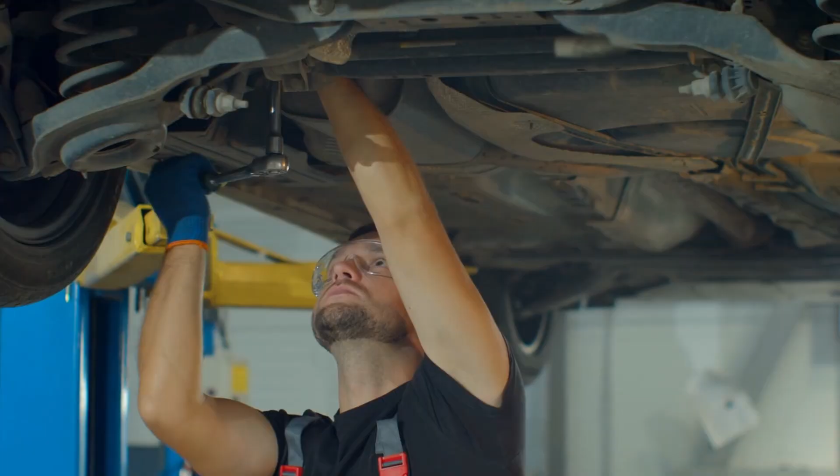There's a secret brotherhood of drivers whose cars outlive decades, even generations. They don't brag, they don't post, they just follow habits the rest of the world forgot. Today, you will learn those secrets, and by the time we reach the last one, you'll see why even professional technicians often skip it without realizing what it costs them in longevity.

Number 1. Warm up the oil, not the cabin. Every winter morning, millions of engines suffer in silence, all because their owners chase comfort before care. You turn the key, blast the heat, and think you're helping yourself. But you're quietly hurting the one thing keeping your car alive. Oil is like blood. When it's cold, it can't protect, can't heal, can't move. So next time, remember, it's not the cabin that needs warmth first. It's the heart beating under your hood.

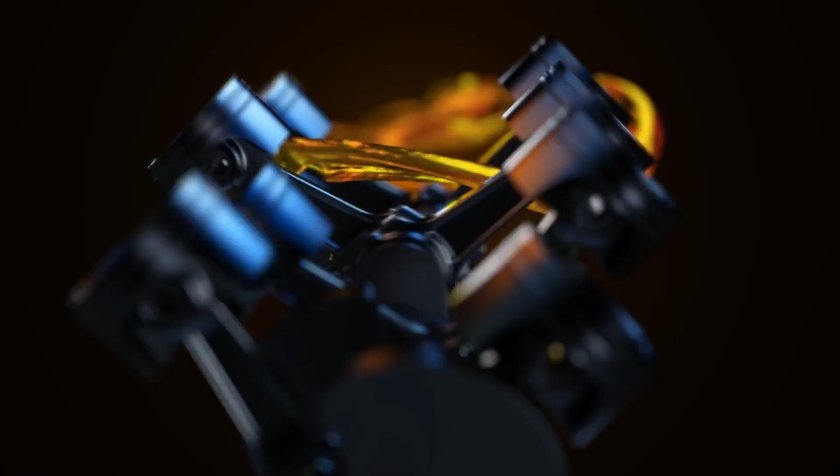The right way to warm up is to drive gently within half a minute of starting the engine. Keep the RPMs low until the temperature gauge stabilizes, allowing the oil to circulate and reach full pressure quickly. This method warms the oil through motion, not wasted fuel, and keeps friction surfaces healthy. Drivers who do this see smoother startups, fewer deposits, and significantly less internal wear. It's the easiest daily habit to extend your car's lifespan.

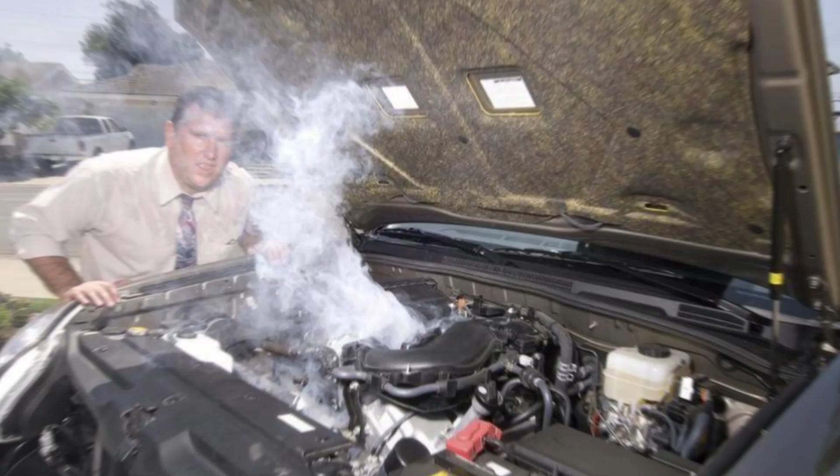Number 2. Change coolant based on chemistry, not mileage. Your car doesn't care about your schedule, it listens to chemistry. Inside your cooling system, every drop of fluid is fighting a war: metal versus oxidation, heat versus protection. Over time, the balance shifts. Additives die, acids rise, and your coolant turns from protector to predator. That's why smart mechanics don't trust mileage, they trust science. Change it by chemistry, or chemistry will change your engine.

Don't wait for a failure or a schedule. Test the coolant's pH and freeze protection twice a year. You can buy a simple test strip kit for a few dollars. If the coolant shows acidity below pH 7 or the color looks rusty, it's time to flush it out.

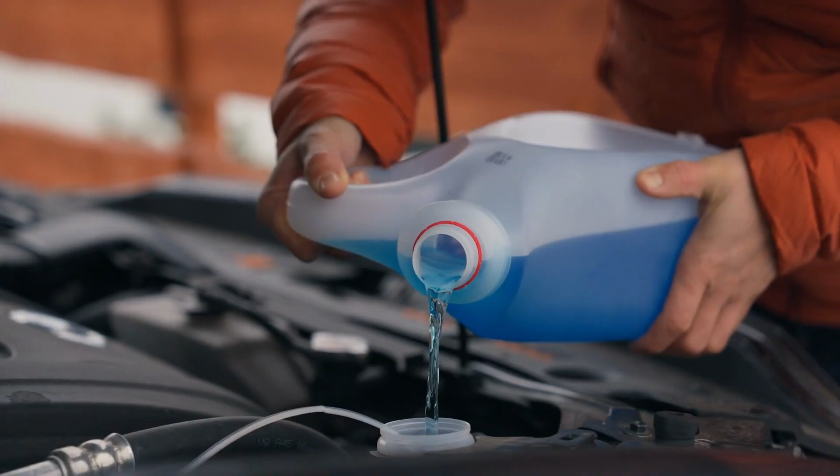The trick is to refill with distilled water mixed with the exact type of coolant your engine requires, not random green or orange fluids. Mixing the wrong chemistry can cause gel formation and block passages inside the engine. This habit keeps your water pump seals healthy and prevents internal rust, which means your cooling system can last as long as the car itself.

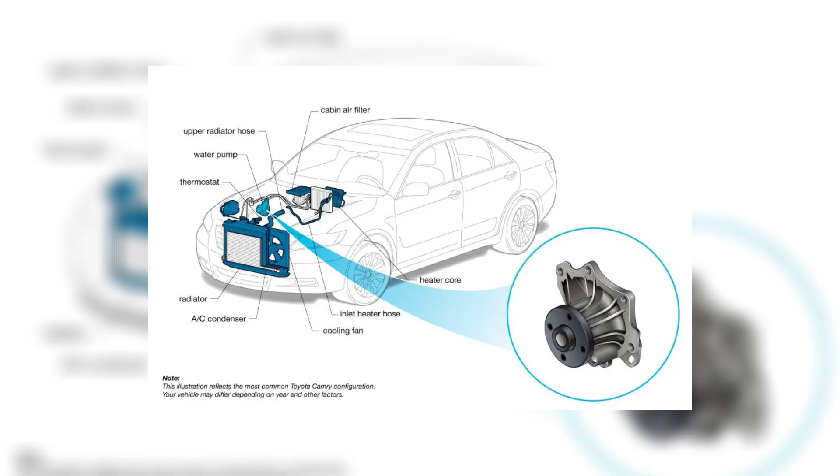Number 3. Change oil by engine hours, not miles. Miles don't kill oil, time does. Every second your engine idles, it's burning chemistry, not distance. Oil doesn't age by how far you drive, but by how long it endures heat, friction, and combustion scars. Think of it like your body. It's not about steps walked, but hours survived under stress. Change oil by hours, because that's how your engine actually lives its life.

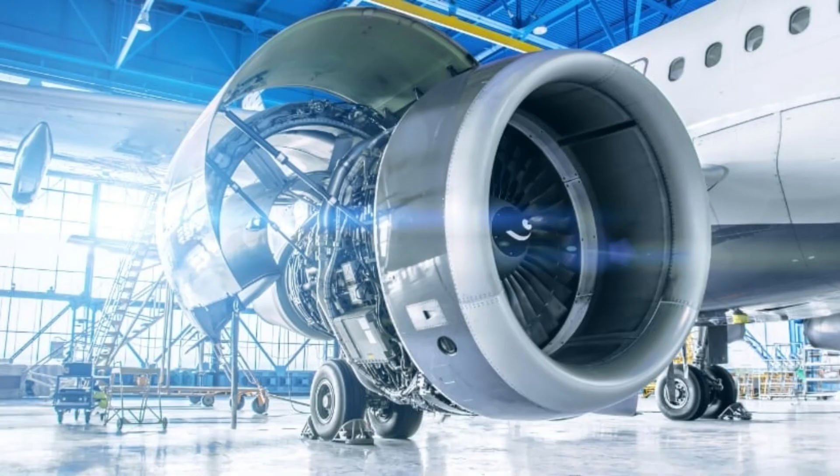A car that idles in traffic for 30 minutes has burned oil life just as fast as one cruising at highway speed. That's why taxis, delivery vans, and even aircraft engines measure wear in operating hours instead of distance. The truth is that 5,000 highway miles might equal only 150 hours of engine time, but 5,000 city miles can be over 250 hours. If your vehicle has an hour meter, use it.

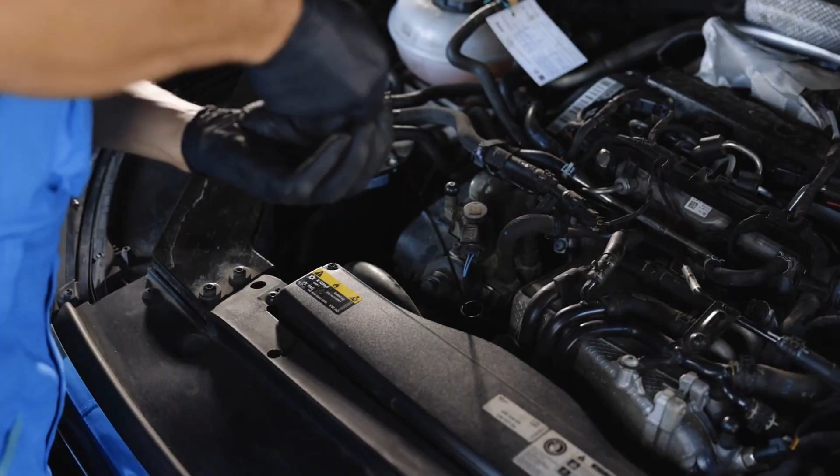If not, estimate 1 engine hour for every 25 to 30 miles of mixed driving. Then adjust your oil change schedule based on that number. It's the difference between replacing oil when it's actually degraded and running it far past its protection limit. Drivers who switch to this system often double their engine lifespan because they catch oxidation and fuel dilution before it becomes irreversible damage.

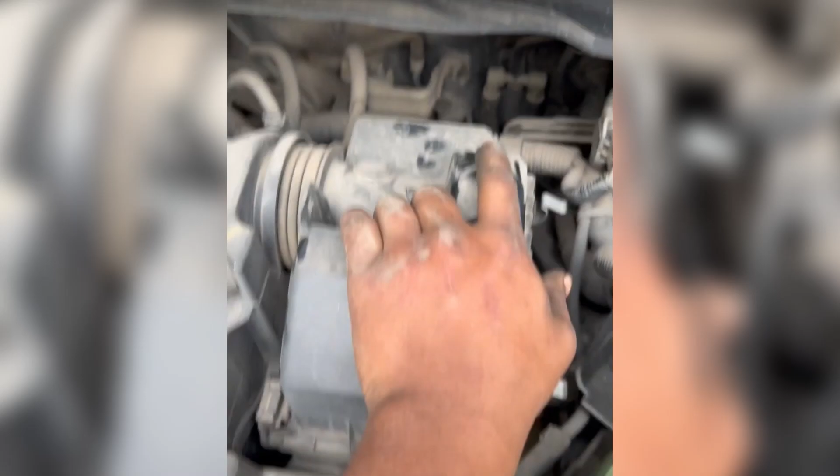Number 4, clean or replace the air filter before it looks dirty. The biggest mistake drivers make is trusting their eyes. Air filters don't fail when they look dirty, they fail when they stop breathing. The danger hides in what you can't see: microscopic dust clogging the fibers long before color changes. By the time it looks bad, the damage is already done. Think of it this way: your lungs don't turn brown before they struggle. So don't wait for dirt to show you it's time. Listen to the science, not your sight.

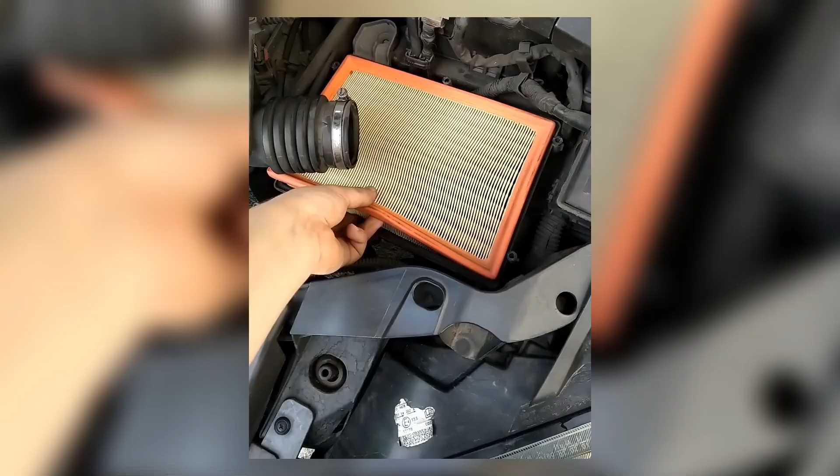That dust doesn't disappear, it embeds itself in the cylinder walls, piston rings, and valves, grinding them down over time. Lab oil analyses on neglected engines show higher levels of silica, the same compound found in sandpaper. The smarter habit is to change your air filter based on driving conditions, not appearance. If you drive in dusty, hot, or coastal environments, replace it every 10,000 to 12,000 miles or even sooner. Rural and desert drivers do it twice as often as city commuters.

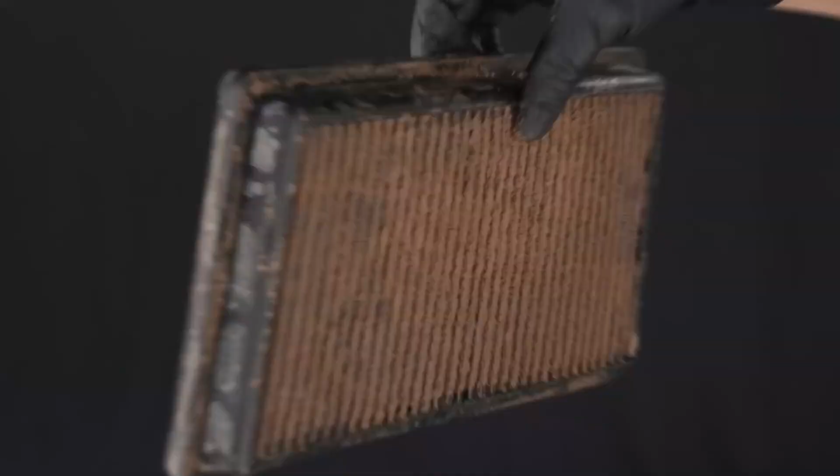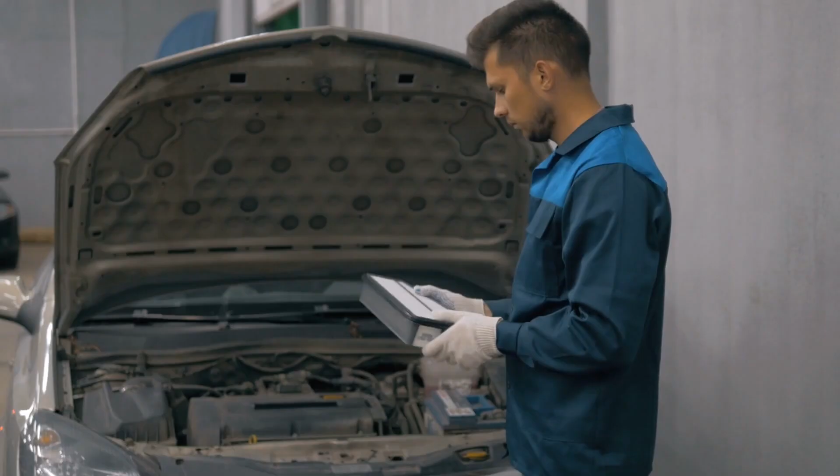If your car uses a reusable filter, clean it thoroughly with manufacturer-approved cleaner and let it dry completely before reinstallation. Never blow compressed air into it. That weakens the fibers and lets dust pass straight into the intake. A clean filter means clean air, balanced combustion, and a longer-lasting engine that breathes easily well beyond 500,000 miles.

Number 5. Use top-tier fuel and keep injectors clean. Every drop of fuel carries a story. It either cleans or it corrodes. Your injectors are surgeons cutting with microscopic precision, but bargain fuel dulls their blades. Over time, residue builds, spray patterns warp, and combustion turns chaotic.

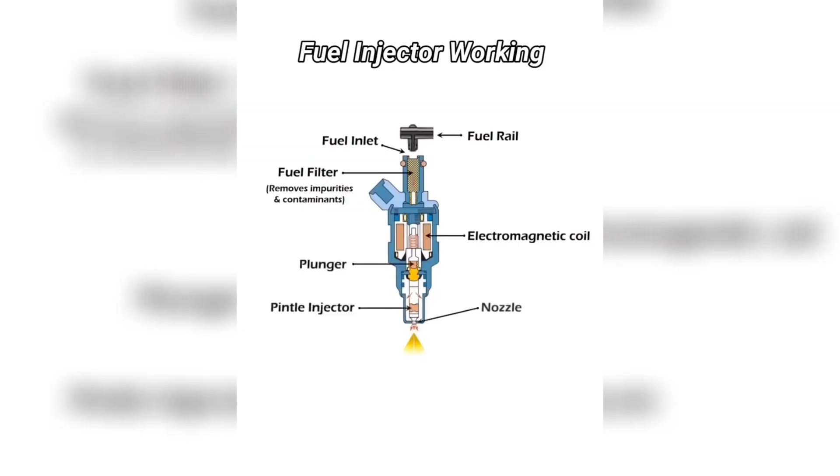The difference between a clean engine and a tired one isn't luck, it's chemistry. Top-tier fuel isn't luxury, it's protection for the heart of your machine. Keep it clean, or every mile you drive writes damage in invisible ink. Fleet mechanics and high-mileage drivers use only top-tier certified gasoline brands like Chevron, Shell, Exxon, or Costco. These contain higher detergent additives that keep injectors and combustion chambers clean.

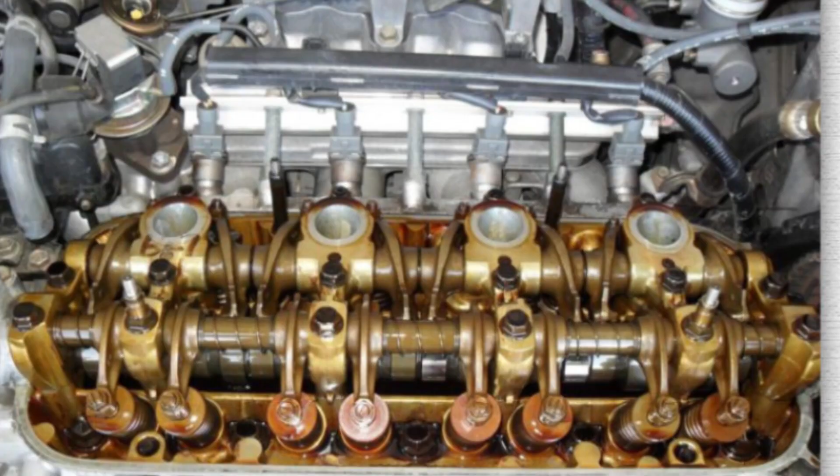If your car has already developed deposits, a good injector cleaner every 3,000 to 5,000 miles can dissolve residue and restore proper spray patterns. To make the cleaner work effectively, add it before a full tank. Then drive at highway speed for at least 20 minutes to help the solvent circulate through the injectors.

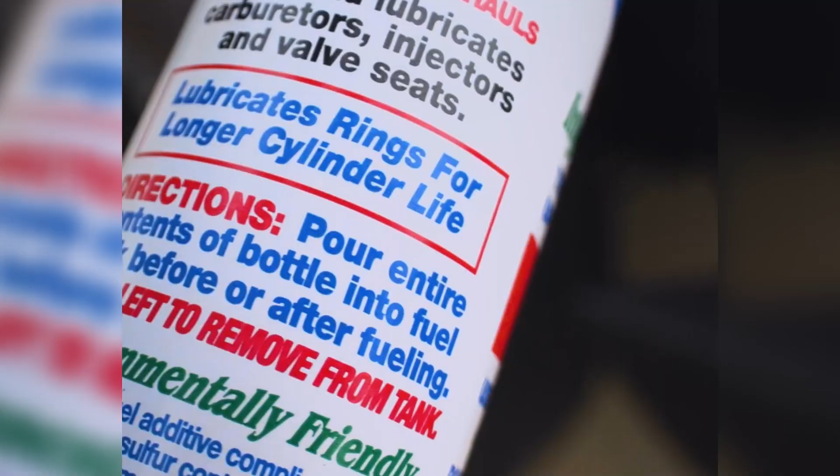The result is smoother power delivery, fewer misfires, and balanced fuel trims that keep wear minimal. This prevents hard carbon buildup, keeps fuel economy steady, and stops the slow loss of compression that ruins most engines before 300,000 miles.

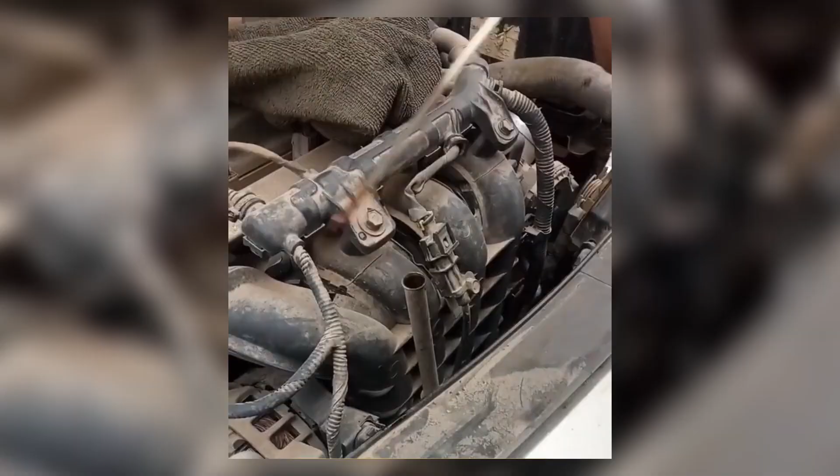Number 6. Check oil condition, not just oil level. Full doesn't mean healthy. You can top off a sick engine all you want, but if the oil's chemistry has broken down, it's like giving clean bandages to a bleeding wound. Oil is your engine's bloodstream. It carries heat, debris, and protection in every cycle. When it darkens, thickens, or smells burnt, it's not oil anymore, it's decay. Don't just measure how much life your engine has left, read it in the oil itself.

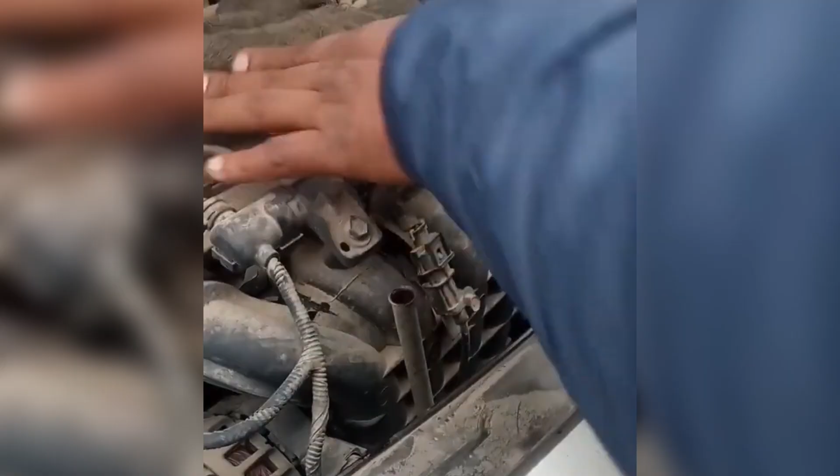When you check oil, rub a drop between your fingers. If it feels gritty or looks like dark syrup, it's carrying abrasive particles that grind internal parts. If it smells like gasoline, that means fuel dilution has thinned it, reducing lubrication. And if it appears milky or foamy, coolant is leaking into the system, a sign of a failing head gasket or oil cooler. A 5-second inspection every month can reveal thousands of dollars in damage before it happens.

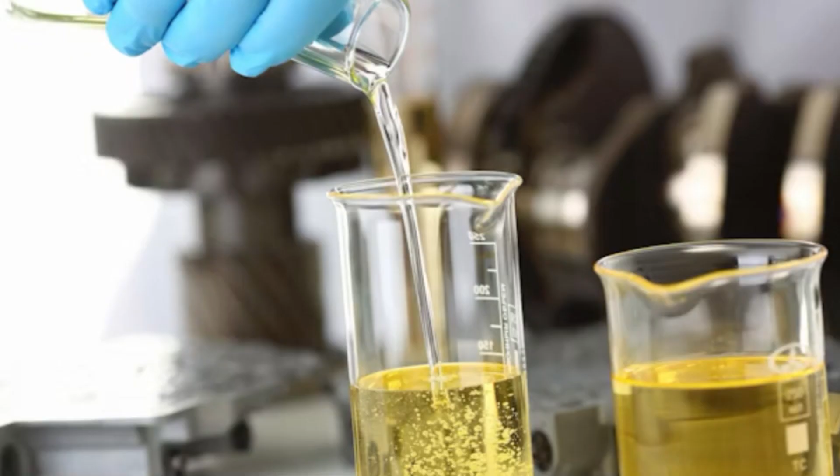High-mileage drivers go a step further. They send oil samples for lab analysis once a year. For about $30, these tests detect microscopic metal wear, coolant intrusion, or fuel dilution that no dashboard light will ever warn you about. That data lets you fix small issues long before they become catastrophic. It's why serious owners of Toyota, Lexus, and Honda engines routinely surpass 500,000 miles without major repairs.

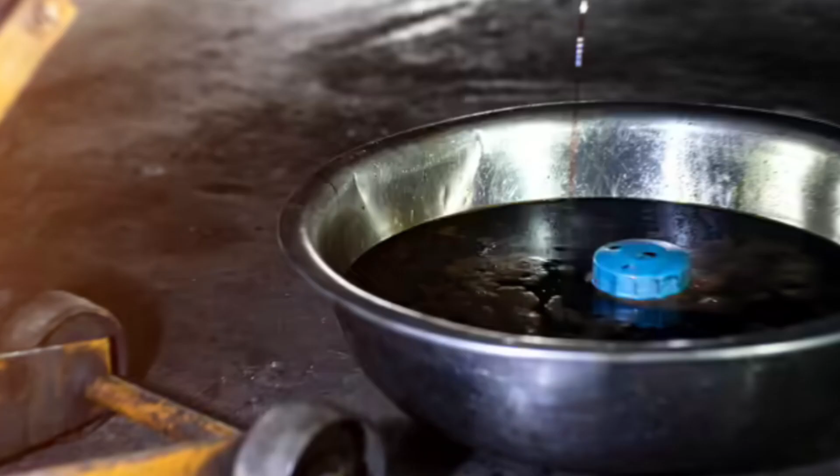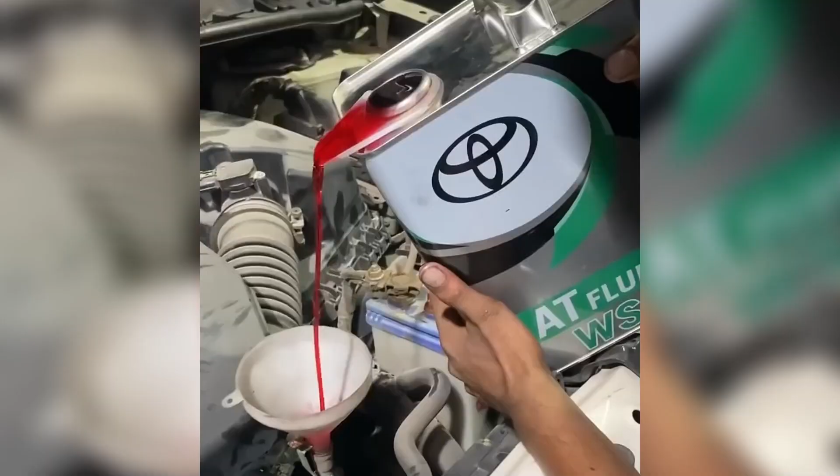Number 7. Replace transmission fluid before it burns. You'll never see the moment it burns, but your transmission will feel it forever. Fresh fluid glows red, alive, and protective. Burnt fluid turns dark, thin, and bitter, like metal fatigue in liquid form. Once it scorches, every shift cuts deeper into the heart of your gearbox. Replace it before the smell of failure appears, because when transmission fluid burns, it doesn't just lose color, it loses mercy.

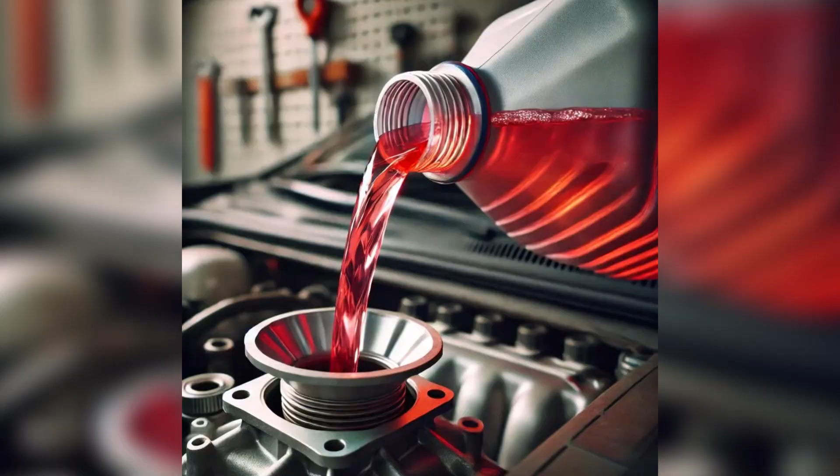The simple fix is to change your fluid every 40,000 to 60,000 miles, or even sooner if you tow, drive in heavy traffic, or live in hot climates. Use only the fluid type listed in your owner's manual. Mixing brands or specifications can cause swelling in seals and unpredictable shifting.

If your car has a transmission filter, replace it during every fluid change. This small detail keeps contaminants out of the hydraulic system and extends the life of your torque converter and clutch packs. Following this one rule alone can push an automatic transmission to 400,000 miles or more, while ignoring it guarantees failure long before that.

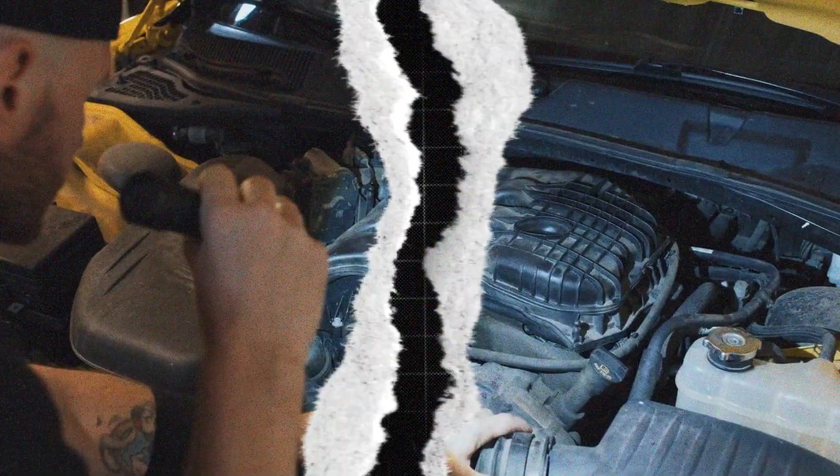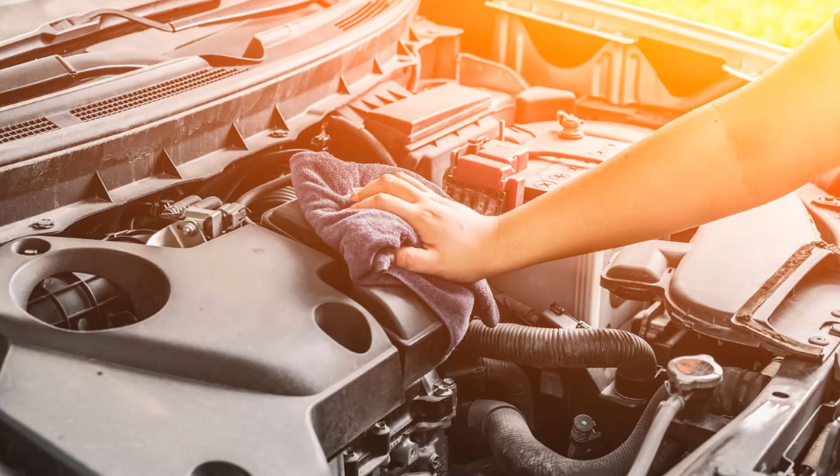Number 8. Keep engine bay temperatures under control. Every car fights two enemies, friction and heat. You can't see them, but they're always there, eating power and patience with every drive. The engine bay is where that war happens, where discipline meets destruction. Let the heat go unchecked, and even steel begins to soften. Sensors lose truth, and fluids turn fragile. Keep your temperatures under control, and you don't just protect parts, you preserve precision. Because in machines and in men, control over heat is control over life itself.

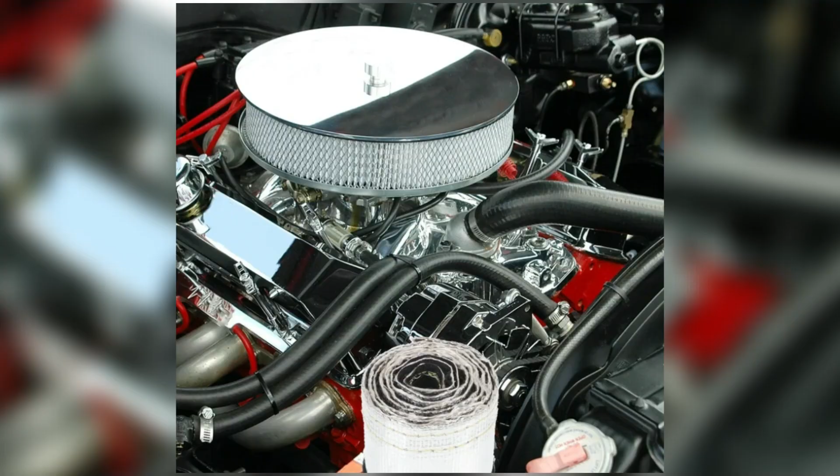To prevent this, regularly clean your radiator and condenser fins using low-pressure water or compressed air. Dirt, bugs, and debris block airflow, forcing the cooling system to work harder. A 10% restriction in airflow can raise coolant temperatures by over 20 degrees Fahrenheit during long drives. You should also inspect heat shields and underhood insulation. They protect wiring and critical sensors from radiant heat. If they've fallen off or rusted away, replace them immediately.

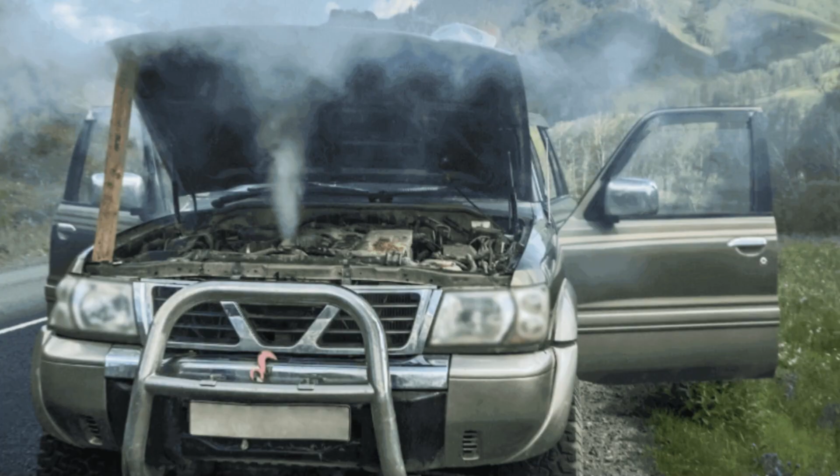For drivers in warm or high-altitude areas, consider installing a lower temperature thermostat or switching to a higher boiling point coolant mix. These small adjustments reduce thermal stress and delay the chemical breakdown of vital components. Engines that stay cool stay clean inside, as oil oxidation and deposit formation slow dramatically when heat is controlled.

This one habit can mean the difference between a 300,000-mile engine and a 700,000-mile legend.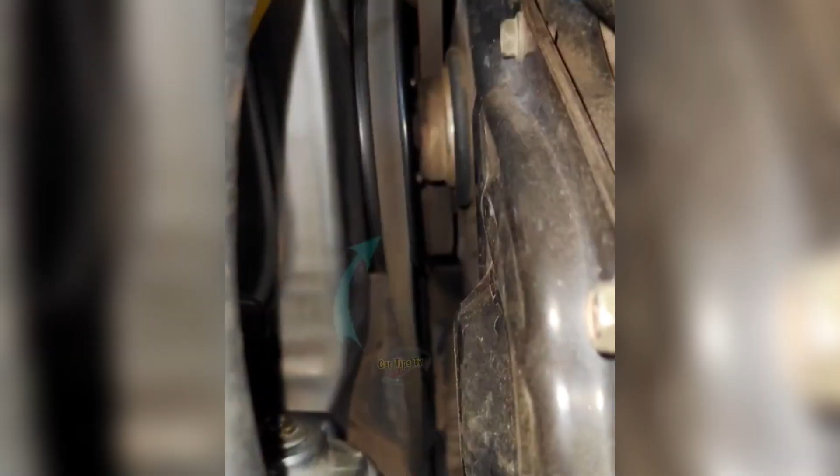Number 9. Replace belts and tensioners before they squeal. Engines don't fail suddenly, they whisper first. A squeal is just the sound of ignored timing, the voice of tension lost. Belts stretch, slip, and scream before they snap. And when they do, everything that depended on their rhythm collapses.

Replace them before they beg, because silence isn't just golden, it's earned. In cars, as in life, the wise don't wait for noise to prove something's wrong. They listen before it starts. Smart drivers inspect their belts every 30,000 miles and replace them every 60,000 to 80,000, even if they look fine. Small cracks or shiny edges are early warnings.

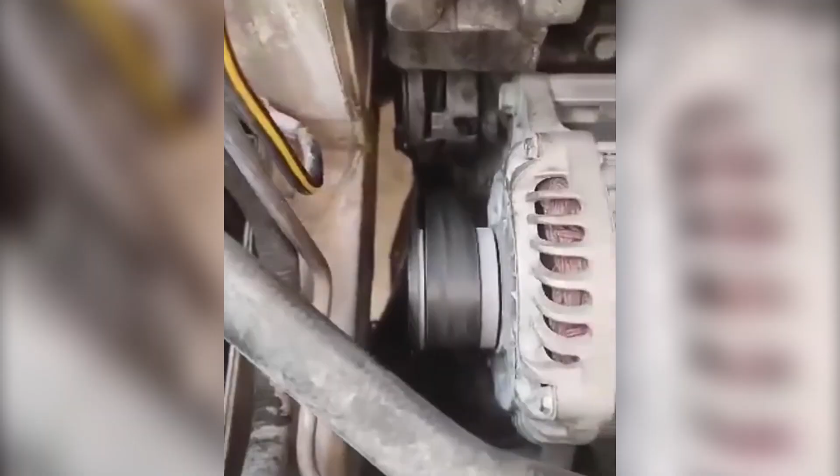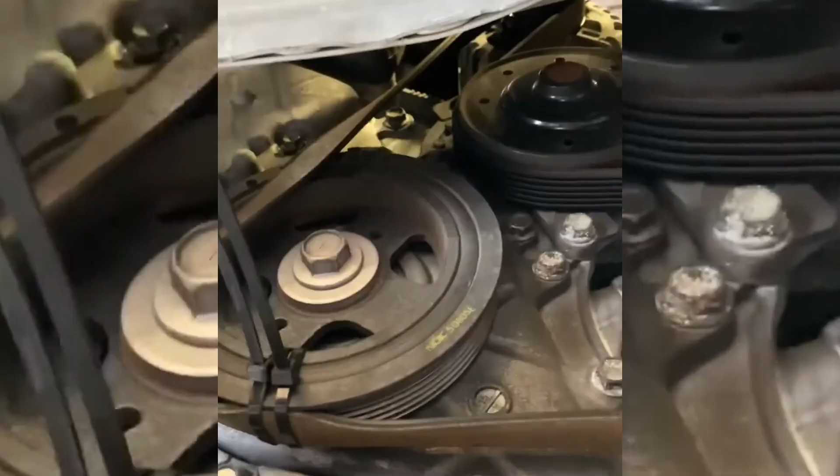When replacing belts, always install a new tensioner and idler pulley together. This ensures consistent tension and prevents premature failure. For timing belts, always follow your manufacturer's interval exactly. A skipped tooth can throw off valve timing or destroy an interference engine in seconds. Proactive belt maintenance costs less than a full tank of gas, but can save you thousands in catastrophic engine damage.

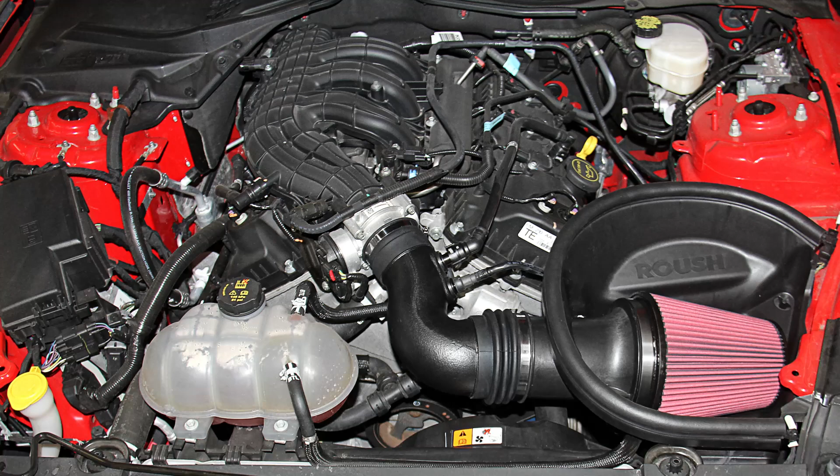Number 10. Keep the intake system spotless. Engines breathe just like we do, and purity matters most where the eye can't see. The intake is the first gate between chaos and order, where every particle of dust tries to steal power before it's born. A spotless intake isn't vanity, it's precision. It keeps airflow honest, combustion balanced, and performance alive. Because when an engine breathes clean, it thinks clearly. And when the air gets dirty, even power begins to forget who it is.

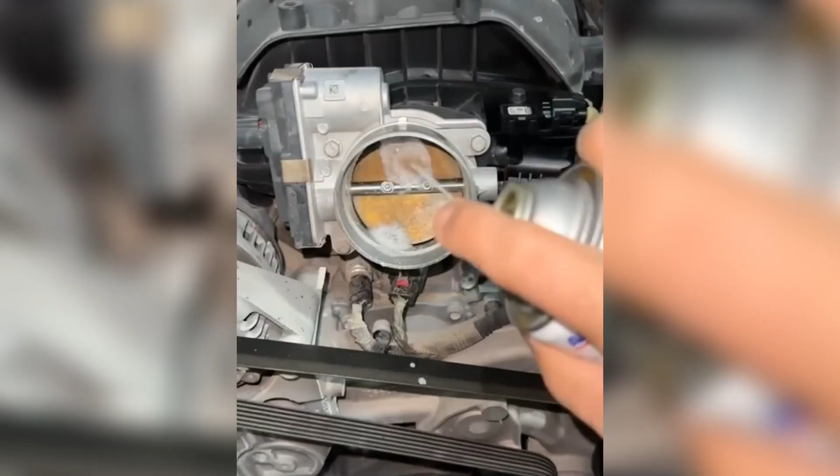For gasoline engines, clean the throttle body every 20,000 to 30,000 miles using a proper throttle body cleaner and a soft microfiber cloth. Pay attention to the throttle plate and the bore. Even a thin layer of film can cause rough idle, hesitation, or sticky acceleration. For direct injection engines, go further. Because fuel never washes the intake valves, carbon builds up fast.

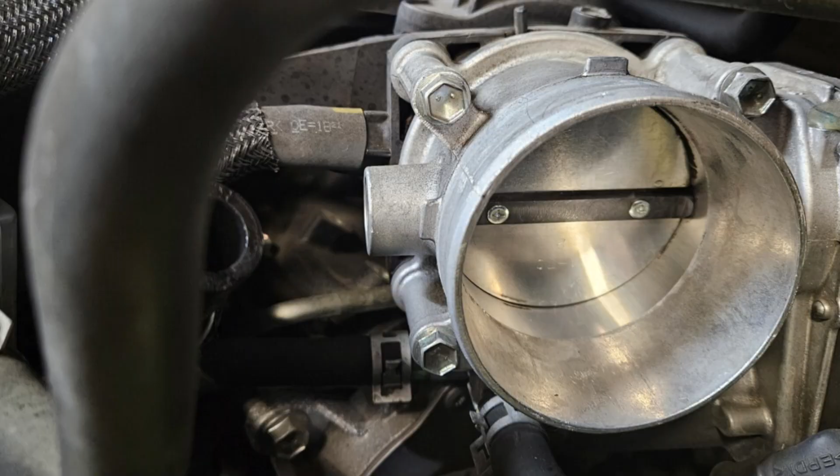Use a valve cleaner or get a professional walnut blasting service around every 40,000 miles. It restores smooth airflow and compression without disassembly. Clean air passages mean balanced combustion, better power, and fewer deposits on pistons and rings. It is one of the simplest yet most overlooked ways to keep an engine feeling brand new after hundreds of thousands of miles.

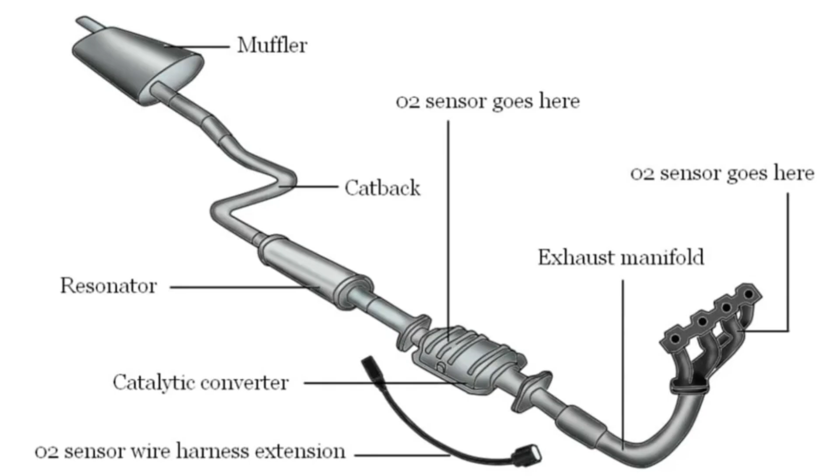Number 11. Keep the exhaust system leak-free and breathing right. The exhaust is your engine's exhale, where power finds release and pressure finds peace. When it leaks, the rhythm breaks, the sensors lie, and the harmony of combustion turns confused. A clean, sealed exhaust isn't about noise control, it's about balance. It lets the engine let go without losing its truth. Because even machines need to breathe right, and when the breath leaks, strength fades with it.

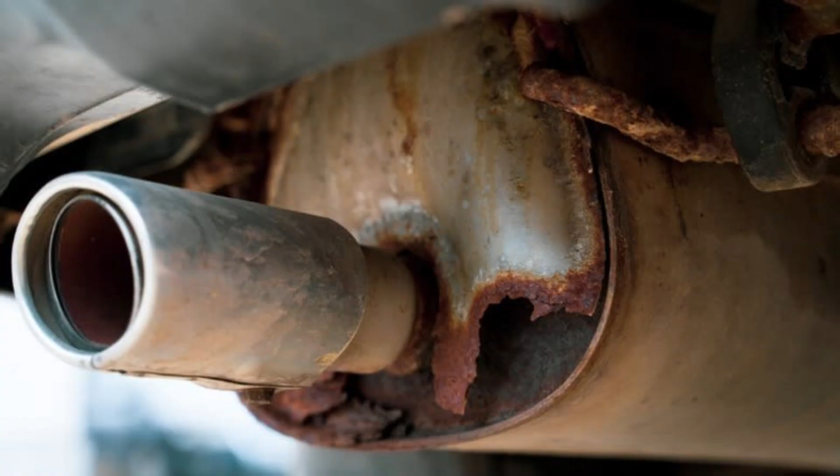The result is subtle at first: rough idle, hesitation, or slow throttle response. But over time, those incorrect readings create a feedback loop of poor combustion and excessive heat. It also allows moisture to enter, rusting the system from the inside. Check your exhaust once or twice a year, especially after winter or driving on salted roads. Look for soot marks, small holes, or a ticking sound when the engine is cold.

A simple clamp or weld repair can prevent long-term damage that spreads to the catalytic converter and even the engine block. Keeping the exhaust sealed ensures accurate sensor data, optimal air-fuel ratios, and balanced back pressure. When your exhaust breathes right, your engine runs smoother, cleaner, and cooler.

Number 12. Monitor engine temperature and oil pressure daily. An engine doesn't die suddenly. It drifts toward failure in silence. Temperature and oil pressure are its two truths, its pulse and breath. Watch them daily, and you'll see the story before it becomes tragedy. A calm needle means harmony. A sudden shift means pain. It's not paranoia, it's awareness. Machines, like people, don't collapse without warning, but only the attentive ever notice.

Make it a habit to glance at both gauges every time you drive. The temperature should reach its normal zone within a few minutes and stay steady, even during long climbs or heavy traffic. If it climbs higher than usual or takes too long to warm up, you could have a weak thermostat or failing fan clutch. Oil pressure is even more critical.

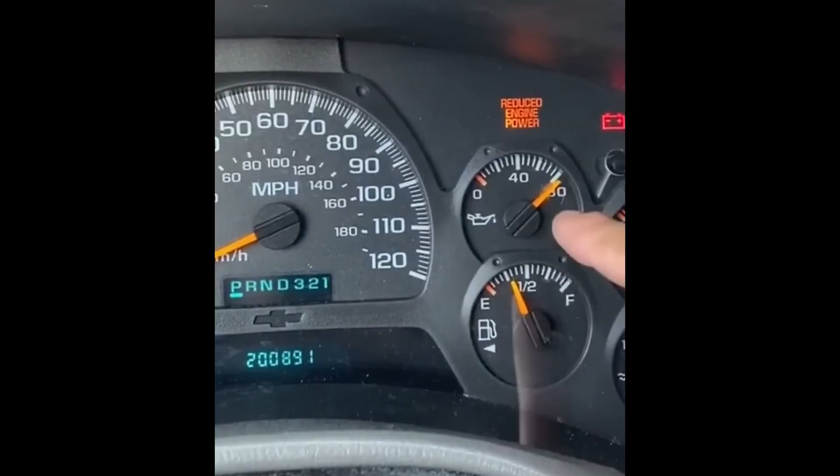A pressure that drops at idle or spikes unusually high points to worn bearings, a clogged filter, or a faulty pump. If your car lacks a gauge, install an aftermarket one. It's a small investment that gives you real-time data instead of waiting for warning lights. Engines that maintain stable heat and pressure live longer, resist sludge formation, and keep seals tight. Consistent monitoring turns minor issues into easy fixes instead of full rebuilds.

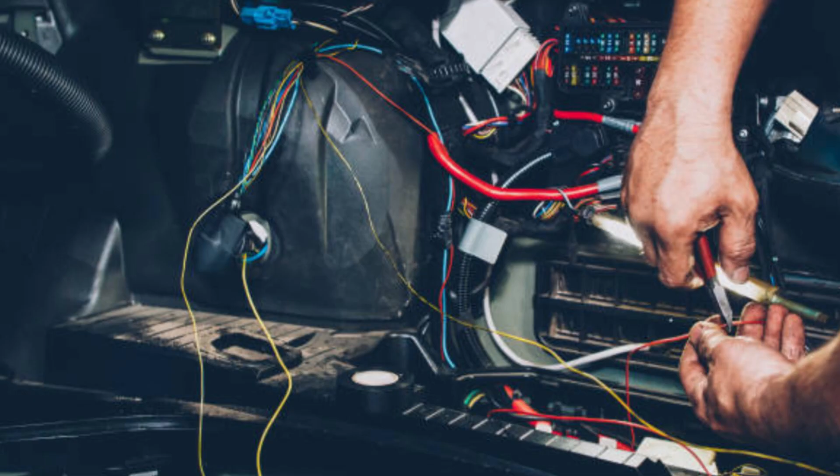Number 13. Keep your electrical system in perfect health. Electricity is the mind of the machine, invisible, instant, alive. It doesn't ask for attention until it's gone, and by then, chaos has already begun. A bad ground is like a broken nerve, one weak connection, and the whole body forgets its rhythm.

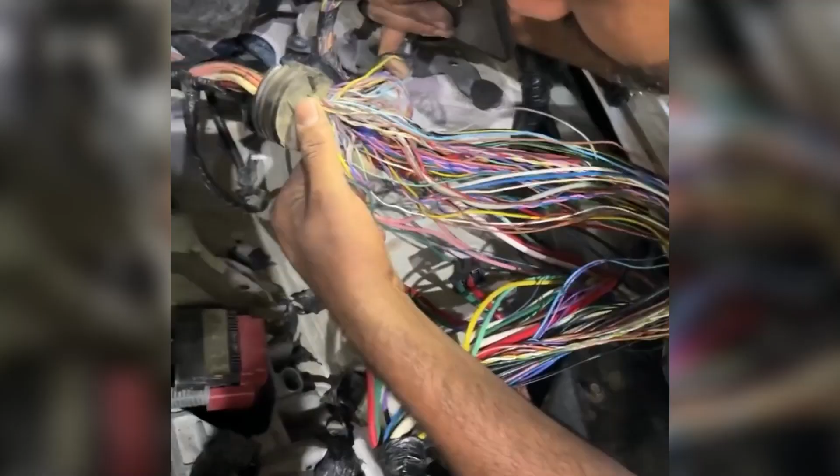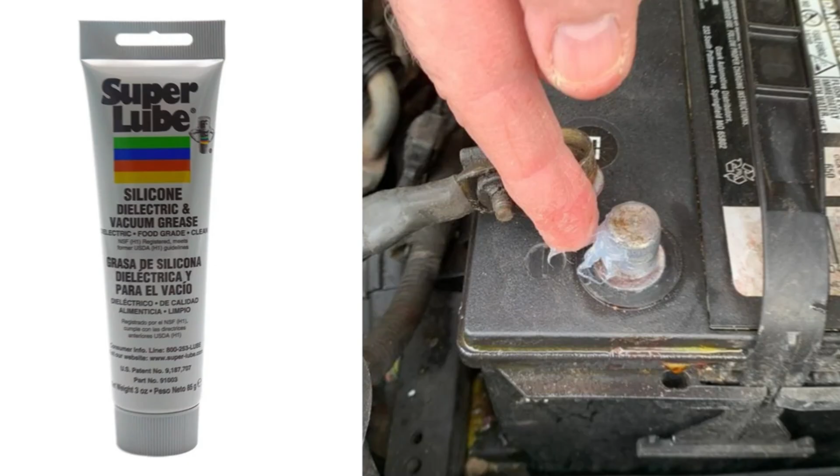Keep your electrical system in perfect health, and your car will think clearly, act instantly, and live longer. Because when the current flows pure, the machine doesn't just run, it remembers what it was built to be. Start by cleaning and tightening your battery terminals every 6 months. Corrosion on the clamps or posts increases resistance, reducing power to the starter and ECU. Use dielectric grease to keep moisture away and prevent oxidation.

Next, check your alternator output with a simple multimeter. It should read between 13.8 and 14.4 volts while the engine is running. Anything lower means the alternator is weak. Anything higher risks overcharging and damaging electronics.

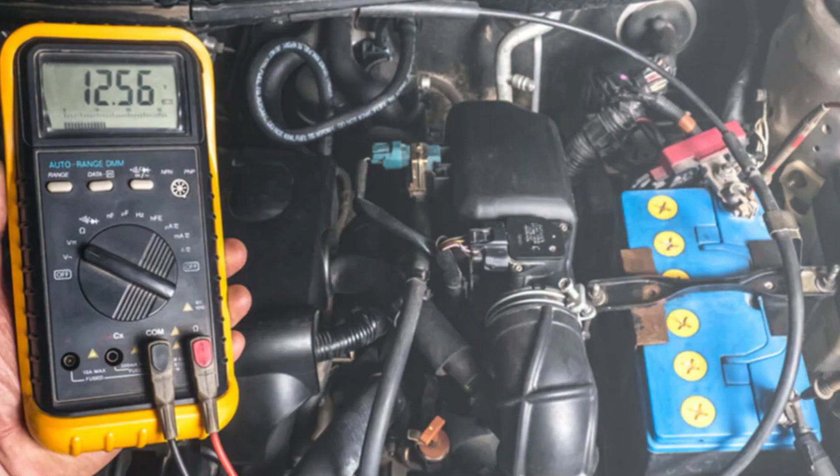Finally, inspect your ground wires. Bad grounds are responsible for strange warning lights, poor sensor performance, and unstable idling. Replace any corroded or frayed cables. When voltage stays stable, every part of the engine operates at peak efficiency. Ignition timing, fuel injection, and sensor feedback all stay accurate, giving you smoother performance and much longer life.

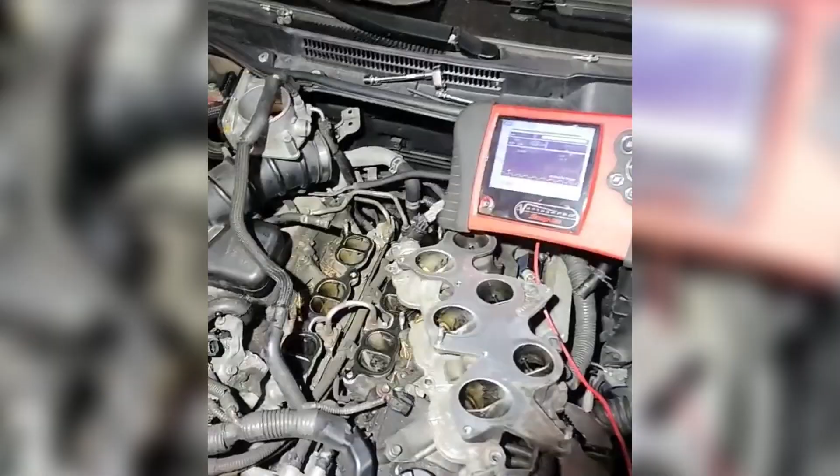Number 14. Learn to monitor your fuel trims. Every engine lives in search of balance. Too rich, it chokes. Too lean, it starves. Fuel trims are how it speaks, how it learns, how it fights to stay perfect. Each number is a confession of struggle, the system adapting to a flaw before you even feel it. To monitor your fuel trims is to listen to the engine's thoughts, to see its corrections before they become cries. Master that awareness, and you'll understand more than mechanics.

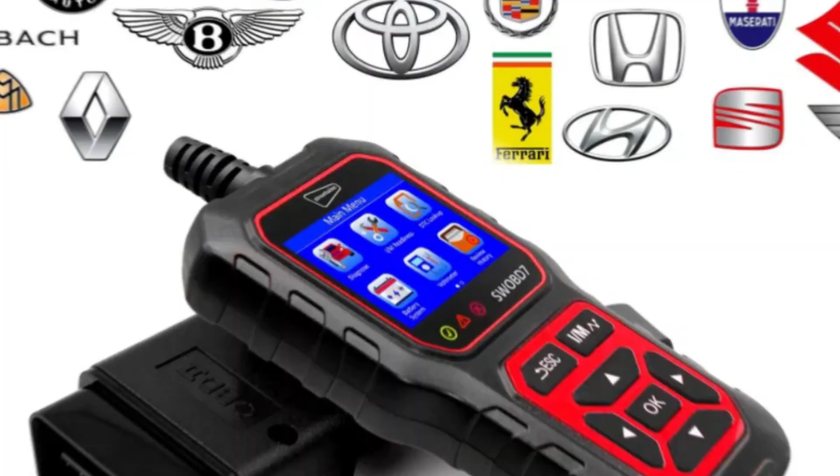You'll understand precision itself. You can check them using a $20 OBD2 scanner and a smartphone app. Long-term fuel trims should ideally stay between -5 and +5% at idle and cruise. Numbers that climb higher indicate a vacuum leak, dirty mass airflow sensor, or restricted fuel injector. Negative numbers mean excess fuel, often from a leaky injector or faulty sensor.

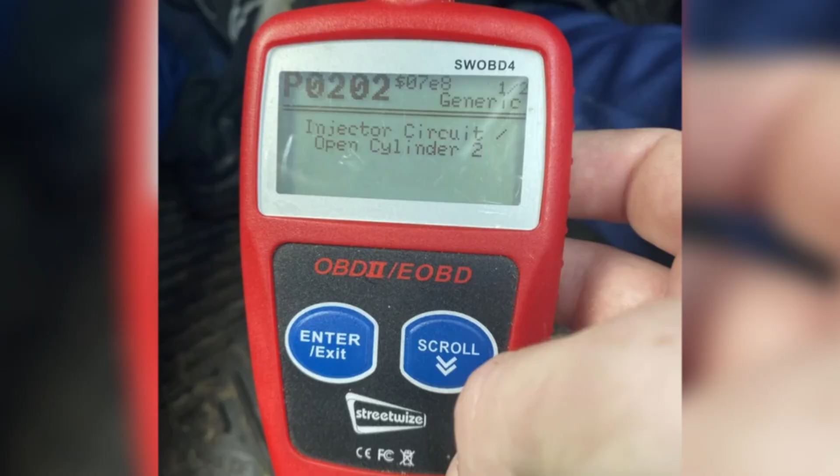Ignoring skewed fuel trims causes carbon buildup, poor fuel economy, and misfires that burn valves over time. Fixing them early prevents compression loss and keeps your catalytic converter healthy. Professional mechanics use these readings every day to diagnose issues before they become expensive. Once you learn to monitor them monthly, you'll know your car's true condition better than any warning light could ever show.

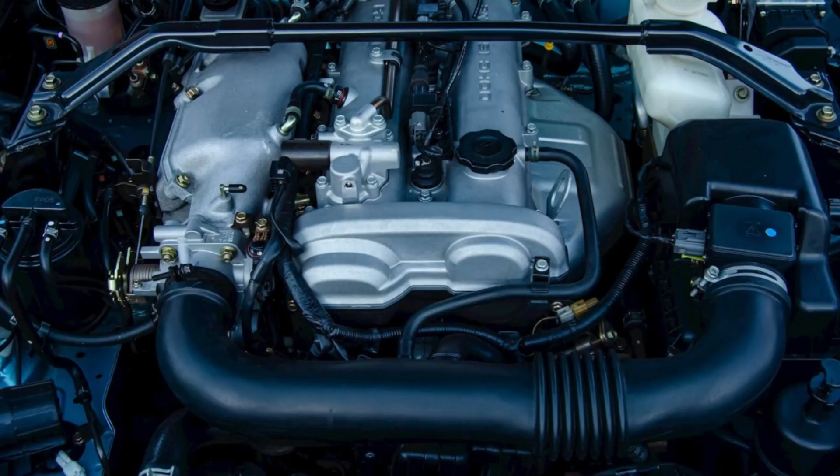Number 15. Replace the PCV valve before it clogs. All engines carry ghosts, burned vapor, memory, pressure that must escape or destroy. The PCV valve is where redemption happens, the single breath that decides whether an engine purifies itself or drowns in its own residue. Let it clog, and the unseen poisons return to the bloodstream, rewriting protection into decay. Replace it before the breath turns bitter, for every machine, like every man, dies not from what enters, but from what it refuses to release.

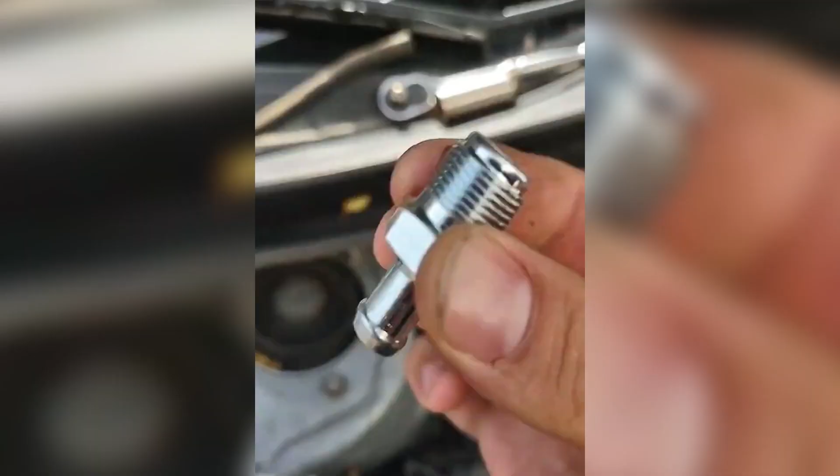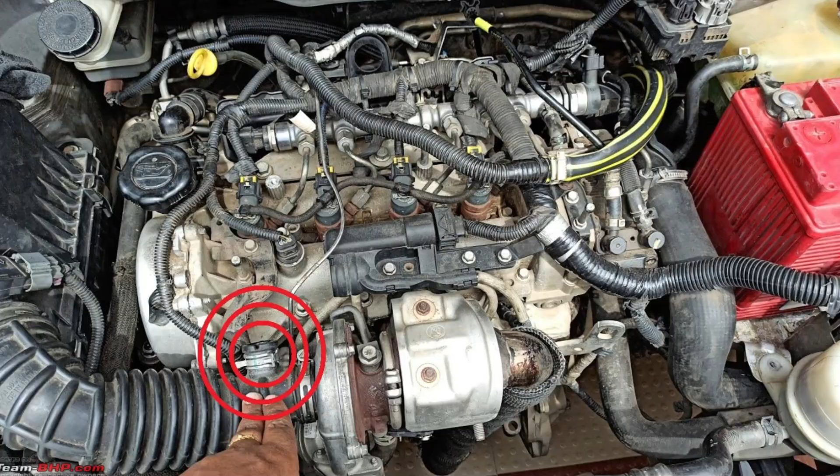Inspect the valve every 30,000 miles and shake it to see if it rattles. If it feels sticky or silent, replace it immediately. Engines that go too long with a blocked PCV system end up with heavy varnish and internal pressure problems that kill long-term reliability. This $5 part is the key to keeping your engine oil clean and preventing early gasket failure, a secret few drivers ever think about.

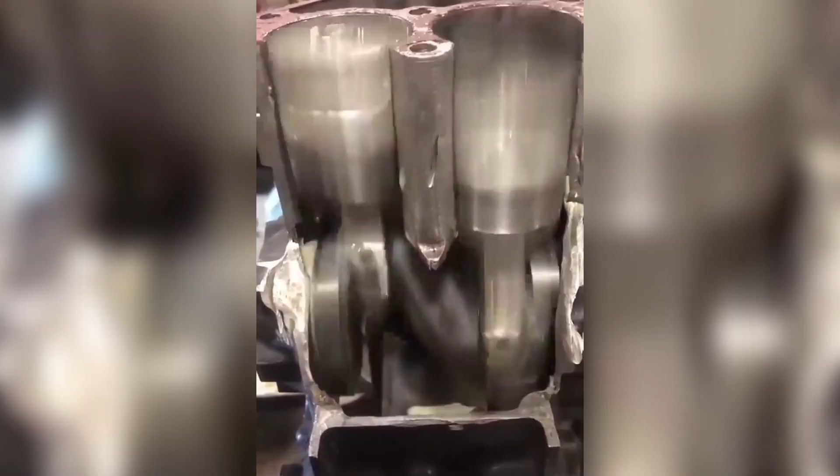Number 16. Clean your fuel system the right way. Combustion is honesty, the pure meeting of air and fuel with nothing hidden between them. But when residue coats the lines, when varnish clogs the heart of injection, that honesty becomes translation, imperfect, muffled, broken. Cleaning the fuel system isn't repair, it's confession. You're not removing dirt, you're restoring truth. Do it wrong, and you force chaos through precision. Do it right, and your engine remembers what it means to be alive. Because purity, whether in flame or in will, is never given, it's earned through care.

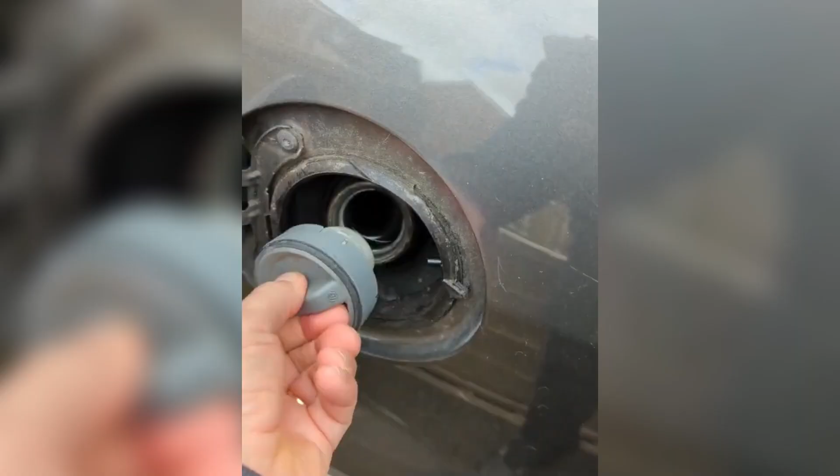Begin by using a pressurized fuel system cleaner or a professional cleaning service that connects directly to the fuel rail. Doing this every 30,000 miles removes varnish, gum, and carbon deposits that build up inside injectors and intake valves. It restores a proper spray pattern, which improves fuel atomization and keeps the air-fuel ratio stable. A clean system reduces knock, improves throttle response, and prevents hot spots that can damage pistons.

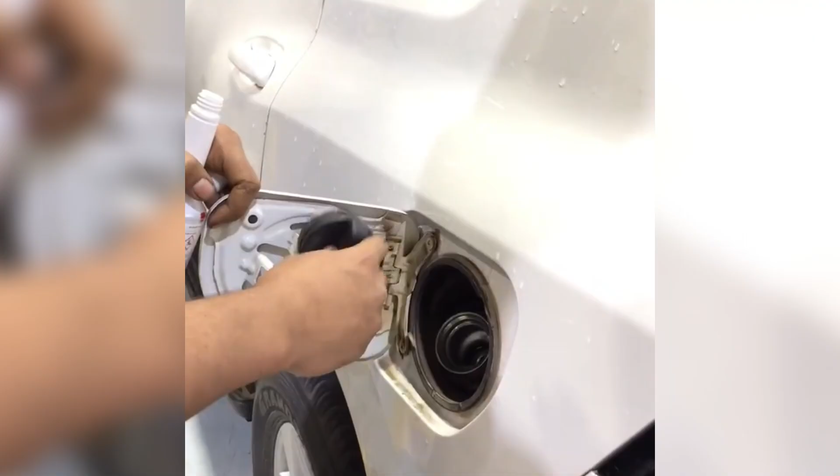Use only cleaners that contain PEA, the same chemical found in top-tier fuels. It's proven to dissolve carbon effectively without harming sensors. Drivers who keep their fuel system spotless often report smoother acceleration and consistent compression even past 500,000 miles.

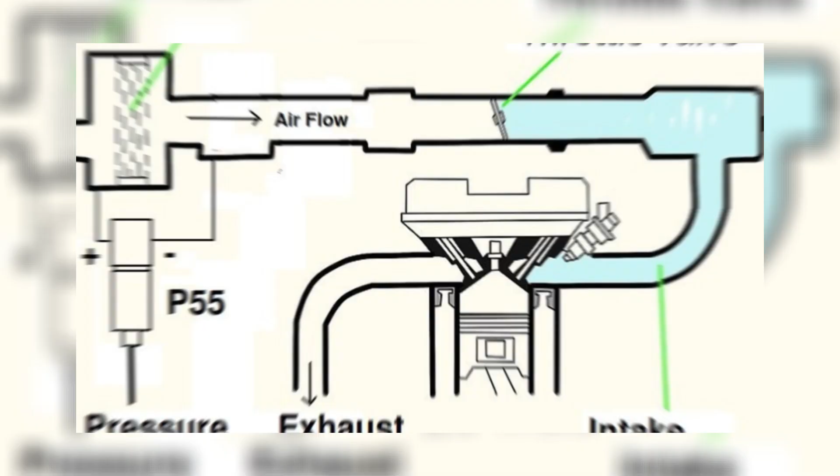Number 17. Monitor air density and humidity for optimal performance. Power doesn't live in fuel, it lives in the air between breaths. Every molecule of oxygen carries potential, but humidity and heat dilute its truth. The engine doesn't fight the weather, it listens to it, adjusting pulse, mixture, and spark like meditation under pressure. Monitoring air density isn't about control, it's about alignment. Because performance is never created, it's allowed when you tune yourself to the language of the atmosphere. Drivers who chase extreme mileage pay attention to barometric pressure and humidity levels, especially during long trips or towing.

Some use inexpensive intake air temperature gauges or OBD2 readers that show real-time data. If intake air is hotter than 100 degrees Fahrenheit, heat soaking may be reducing efficiency, and a simple heat shield or cold air intake can restore cooler airflow.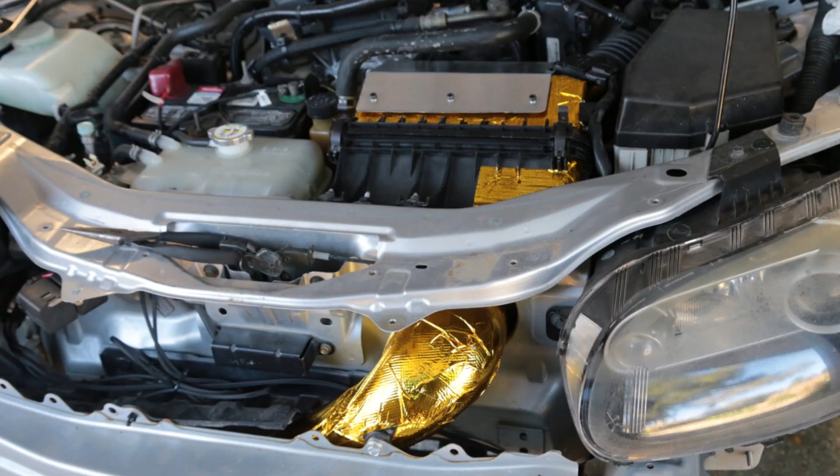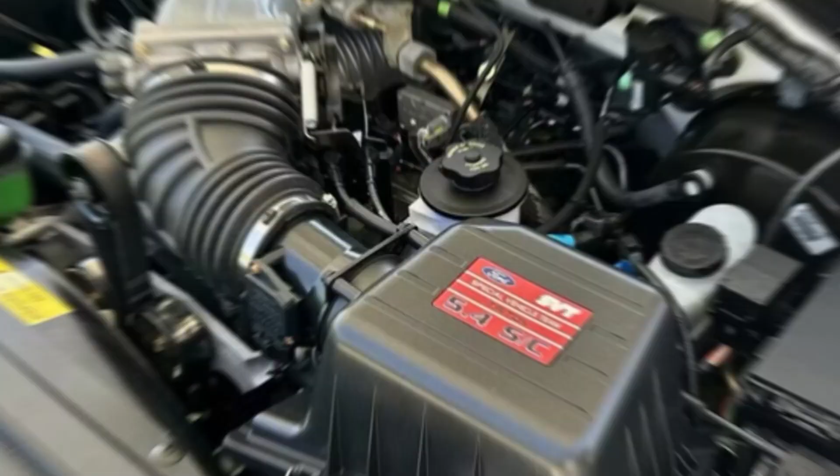Monitoring these small variables keeps combustion balanced and prevents the ECU from overcompensating with rich mixtures. It also helps you identify when filters or sensors might be restricting airflow. Engines that consistently receive dense, cool air burn cleaner, stay smoother, and show less deposit formation over hundreds of thousands of miles.

Number 18. Clean and inspect your engine sensors regularly. Awareness is machinery's first virtue. The sensors are its eyes, its skin, its intuition, silent interpreters of the world's chaos. When they darken with dust, the engine dreams false realities, chasing mixtures and timing that never existed.

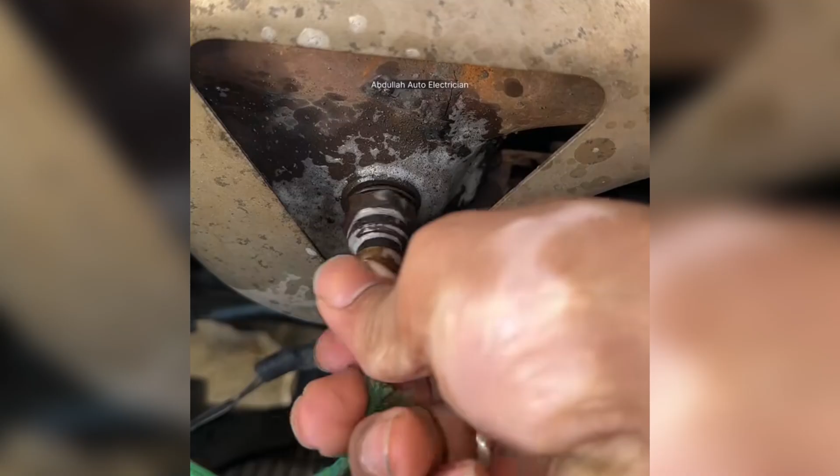Cleaning them is not maintenance, it's awakening. You're restoring perception, washing the lens through which the machine knows itself. Ignore that ritual, and precision becomes delusion. For every engine and every mind, ignorance begins when the sensors are dirty.

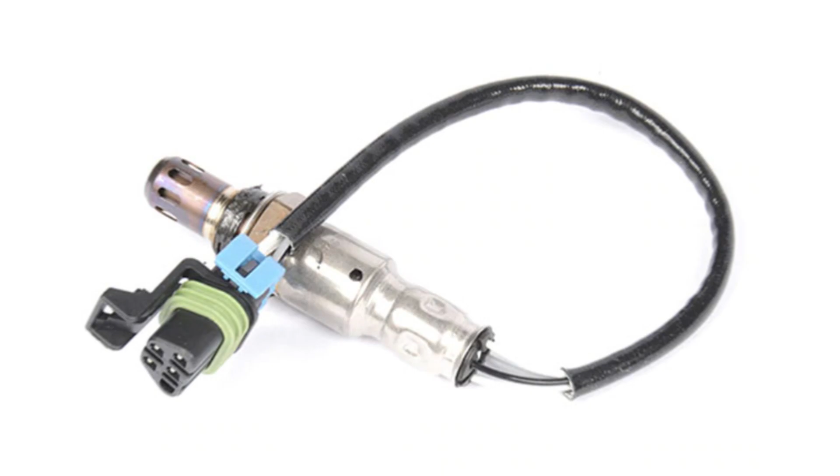The most critical sensors to clean are the mass airflow and oxygen sensors. The MAF sensor sits near the air filter and measures incoming air volume. Use a dedicated MAF cleaner every 20,000 miles to remove film or oil residue. Never touch it with your fingers, the wire is extremely delicate.

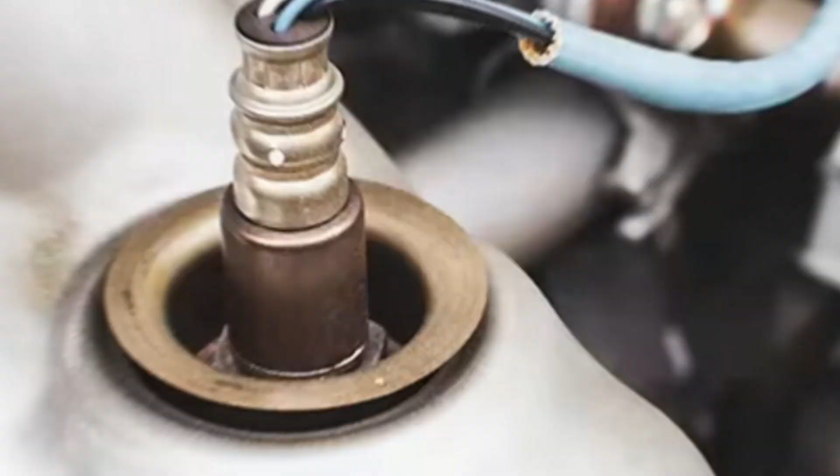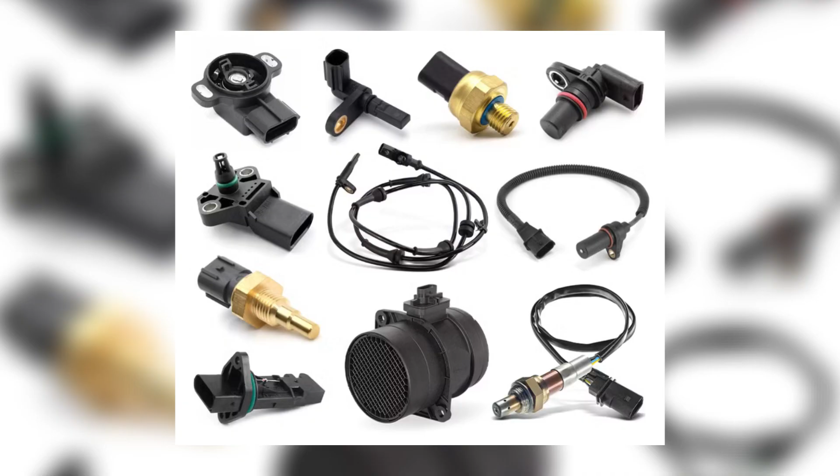The O2 sensors in the exhaust can also degrade slowly, especially if you use fuel with high ethanol or additives. Replacing them every 80,000 to 100,000 miles keeps fuel trims accurate and ensures catalytic converter efficiency. A healthy sensor network keeps the ECU tuned perfectly, delivering smooth idle, ideal combustion, and balanced fuel economy. It's one of the simplest yet most powerful ways to keep your car running like new past 500,000 miles.

Number 19. Replace the thermostat before it fails. Every engine survives by equilibrium. Too cold, it weakens. Too hot, it rebels. The thermostat is its conscience, opening only when the heart can bear the heat. But age dulls its judgment. Scale gathers in the spring until reason hesitates.

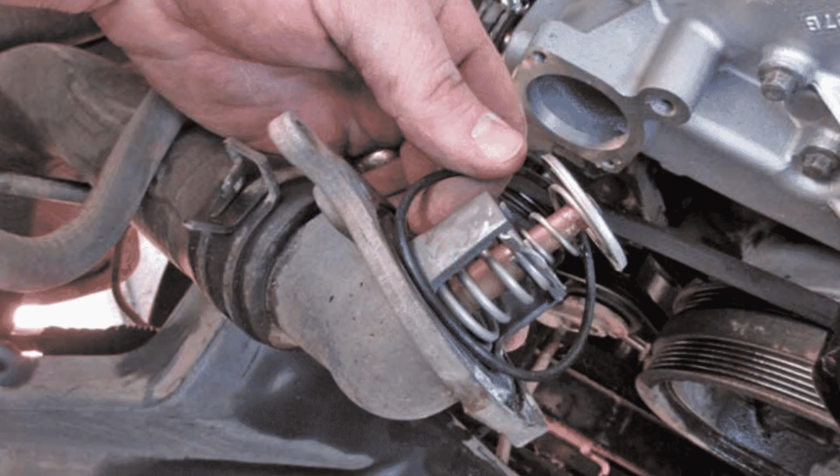Then pressure rises, silence cracks, and the system turns against itself. Replace the thermostat before it betrays its own wisdom, because no engine and no soul collapses from heat alone, but from forgetting when to let warmth go.

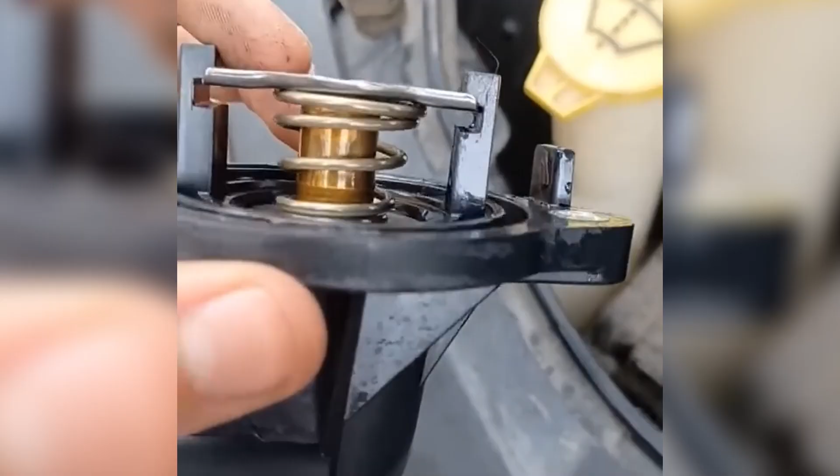Most thermostats start to weaken long before they actually fail. The wax inside that controls opening and closing slowly breaks down after thousands of heat cycles. That's why experienced mechanics replace thermostats every 60,000 to 80,000 miles, or whenever a cooling system service is performed.

If you notice your temperature gauge fluctuating, your heater blowing cold air at idle, or your engine taking too long to warm up, it's time for a replacement. Always use OEM grade parts and new gaskets to ensure a proper seal.

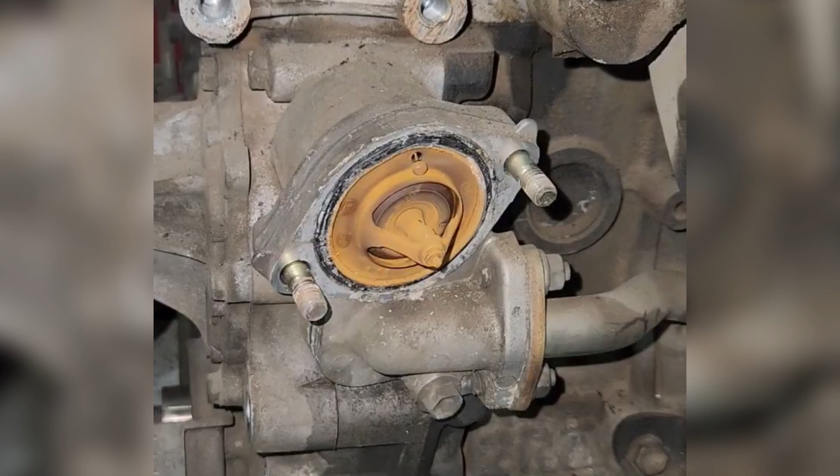A fresh thermostat stabilizes your cooling system, prevents engine stress, and keeps fuel mixture calibration steady. One small part leads to big results. It's one of the secrets to engines that live long beyond their expected limits.

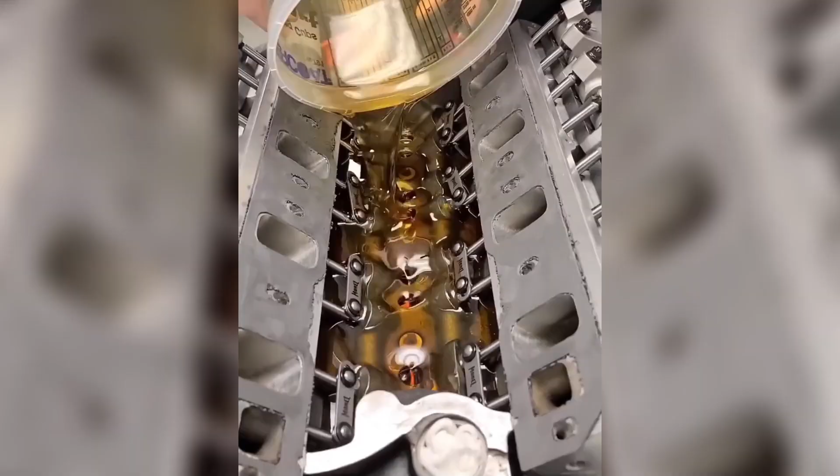Number 20. Drive like your oil depends on it. Oil is the memory of motion, the living archive of every decision you've made behind the wheel. It doesn't forget heat or hesitation or the seconds you asked for power before pressure. To drive well is to write gently into that memory, to move with intention so the film between metal and friction stays whole. Abuse it, and the oil grows old before its time, thick with regret and carbon.

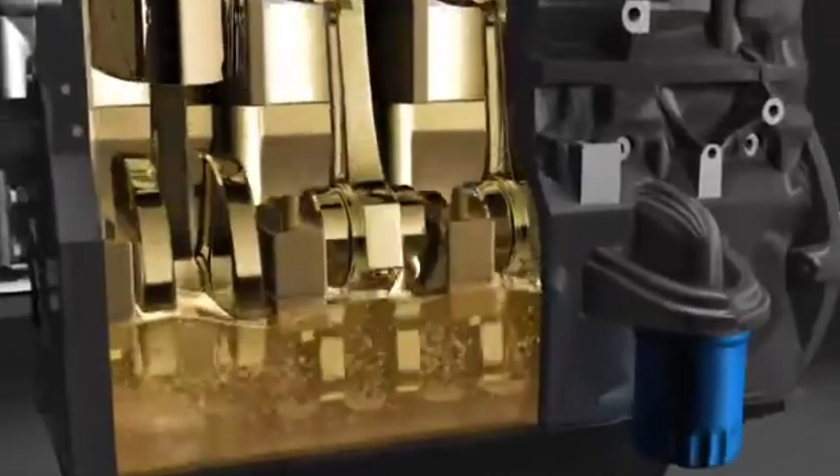Drive like your oil depends on it because it does, and so do you. For the line between endurance and exhaustion isn't drawn in steel, but in the grace of how you move through pressure. Engines thrive on smooth inputs. Avoid sudden throttle changes, especially when the engine is cold. Letting it reach full temperature before demanding power ensures the metal parts have expanded evenly and the oil film is strong enough to protect them.

Long-distance driving is even better. Continuous highway runs evaporate fuel and moisture that collect in the oil during short trips. Fleet studies show engines that average longer trip durations last nearly twice as long as those used mostly for stop-and-go traffic.

Think of your oil as the bloodstream of the engine. Steady, balanced flow keeps everything alive. Treat every drive like a warm-up lap, and your car will return the favor with hundreds of thousands of extra miles. Longevity is vital to your vehicle to ensure little to no disruption in your day-to-day life.